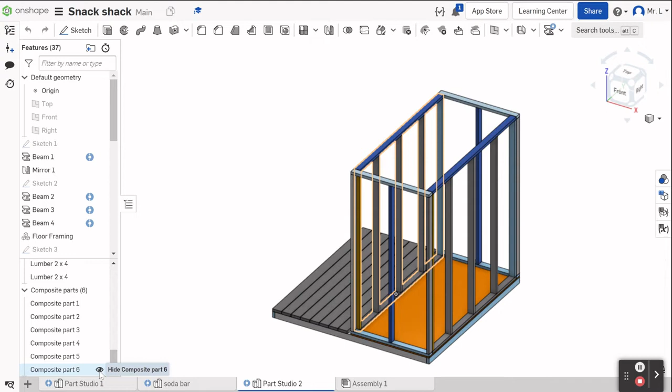So I'm going to make some of these composite parts invisible. I got to find the right ones. Basically, I want to make the walls invisible to get them out of our way to start with. There we go, make these all disappear by selecting our composite parts and clicking on the little eyeball. And so now those have disappeared.

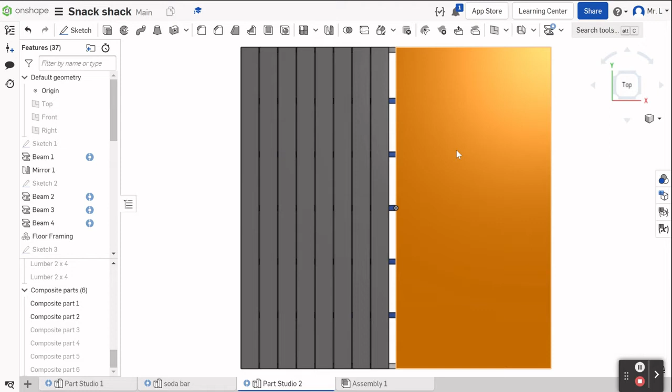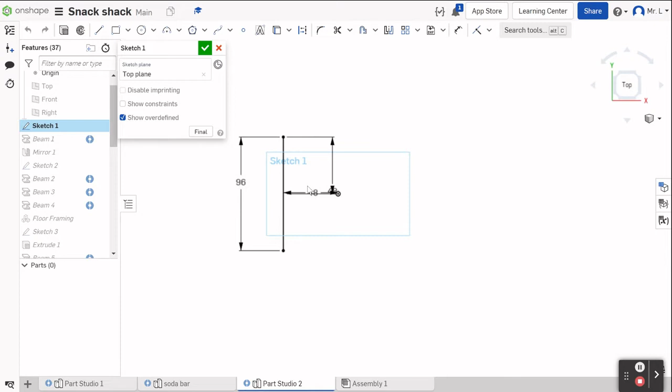Now we need to look at, I'm going to go to a top view here. We're going to have to remove some of these, but I'm going to go and find the sketch where I made the floor, which was actually sketch 1. So I'm going to go to sketch 1, double click it. Is that the right one? That does not look like it. Was it sketch 3? Let's see. Sketch 3, there we go.

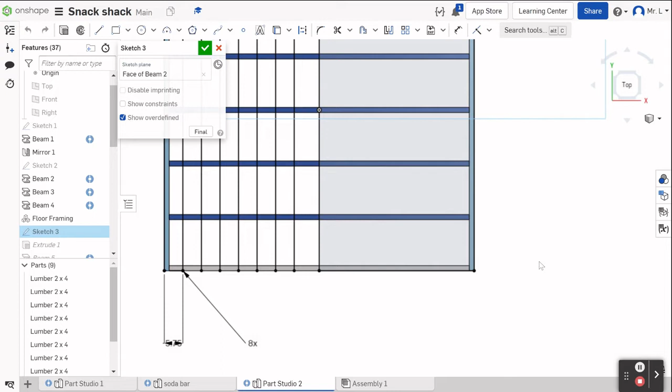Okay, so I'm going to go with sketch 3 here, and I'm going to delete that. And I'm going to go and draw a rectangle, so I'm going to go with a corner rectangle. I'm going to attach it here, drag it down, and attach it to the outside here.

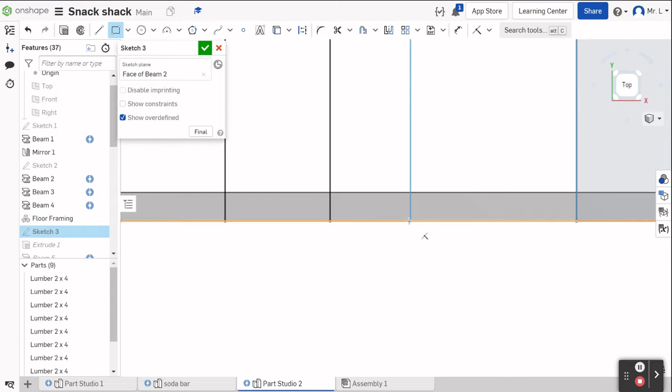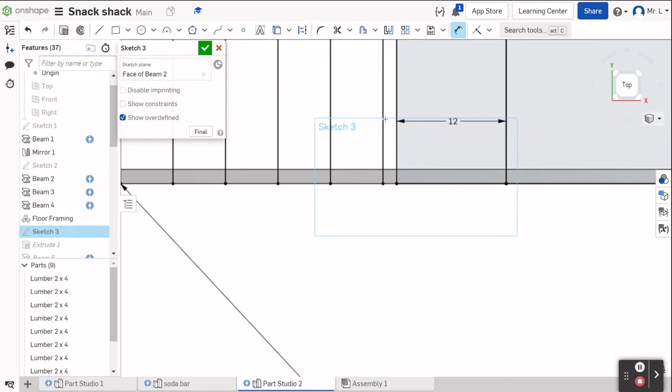So notice the depth of it is still not defined. Then I'm going to go to my dimension tool, and make it a foot, because instead of 4x8, we're going to make it 5x8. So we're going to go 12 inches, 12, enter. Okay, and I'm looking at this. I can already tell it's going to be way too close to this board, so I got to get out of the dimension tool. Escape dimension. Now I'm going to click on that. I'm going to hit delete.

Now I'm going to go with my green check, and that gives us something looking like that. Now I'm going to go back up to the extrusion. Was it extrude 1? Yeah. So actually first I got to turn sketch 3 back on. Show sketch 3. We're going to turn sketch 3 back on so we can see that. I'm going to go back to extrude 1, and I am going to click, oh, you know what?

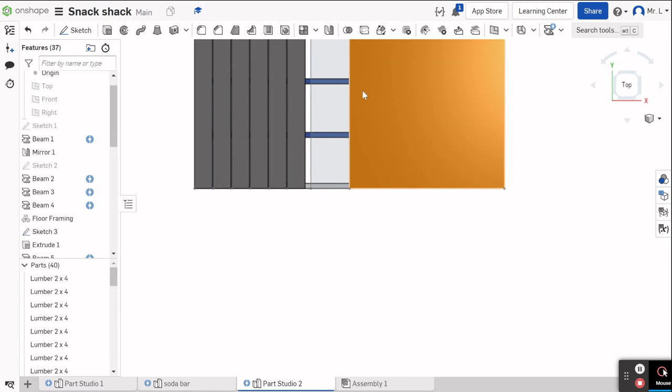Cancel that. I'm going to have to make a second extrusion. The only reason is because if I were to just add it to the existing extrusion, it would make this one piece, and we want this to be 2 distinct pieces of wood. So we're going to go up here to extrude. I'm going to select that, and good, it stayed as new. If it had defaulted to add, it would have added it and made it part of the same piece here. We don't want that, so we're going to make sure we keep it on new, and make it 3/4 of an inch, so 0.75, and click off of that.

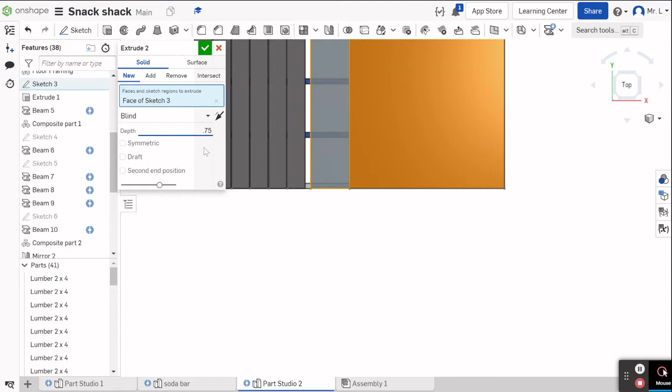Make sure it still says new, which it does. Green check. So now we've got our floor that comes out an extra foot, so we have a 5x8 area inside. So we're going to do that.

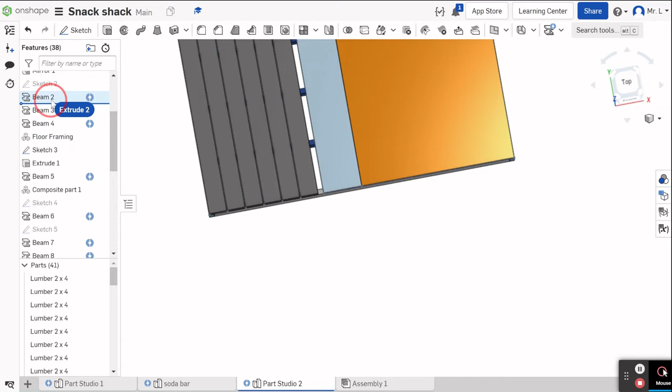Now the next part of the problem is, see, we've got extrude 2 way down here. We need to slide that up because some of our other things are based on this, and so it needs to be above the drawings that come above the floor. So we're going to come here and drop it right down underneath extrude 1, pull it up there, and then I'm going to turn off sketch 3 again and hide that so it doesn't clutter up our view.

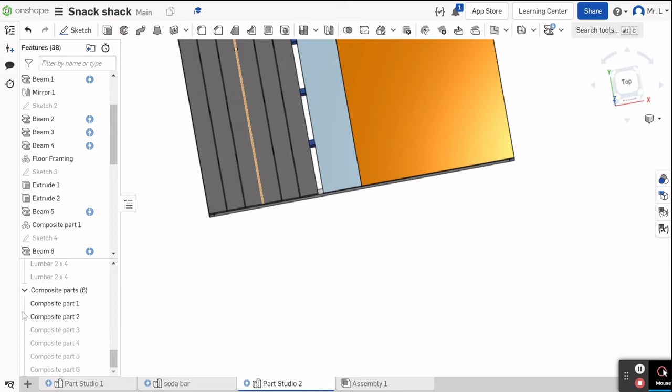All right, so the next thing we've got to do is figure out where all of our walls are going to go. We're going to have to move our walls, basically. Apologies for interrupting again. Okay, so I'm going to figure out, let's see, we've got our flooring, our floor frame, extrude 1, extrude 2, our flooring. What was sketch 4?

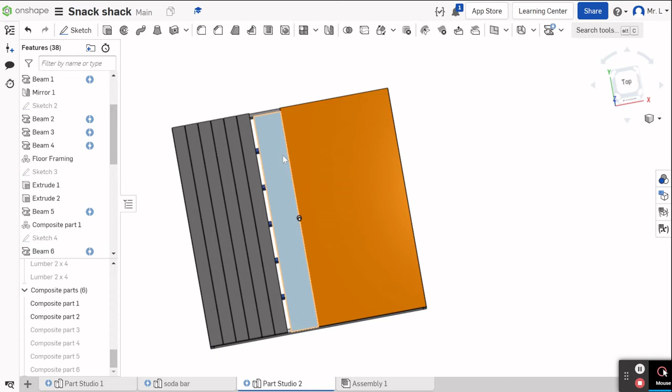Oh, I see right here my extrude 2 didn't go all the way to the edge, so I'm going to come back up here to extrude 2, double click on it. I've got to turn the sketch back on momentarily, and click this little piece over there, green check. Now I've got a floor that goes all the way across, so I'm good to go there.

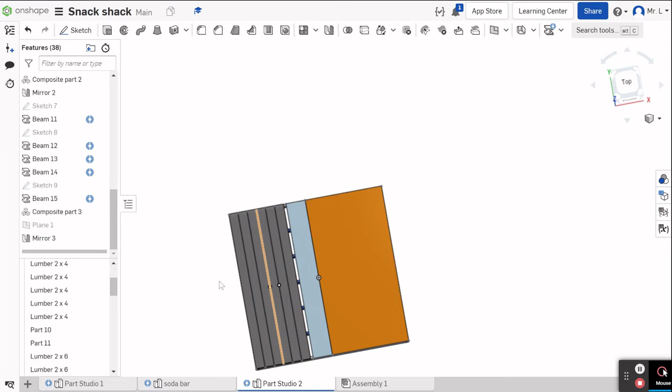All right, here's where it gets tricky. I have to figure out which walls I put in first, so I guess what I'm going to do is start turning composite parts back on and look and see what they're drawn off of.

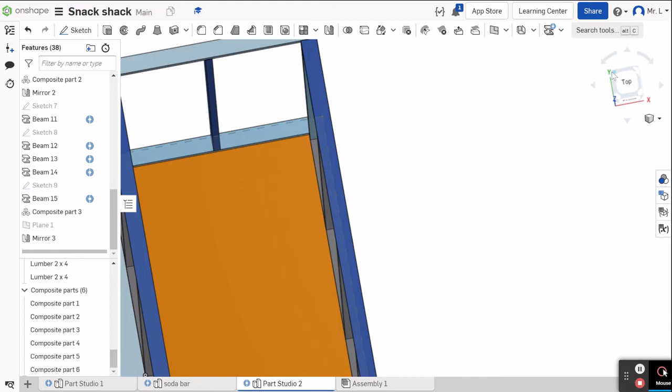So everything's turned back on. I'm going to flip this around. I think I drew on this side, beam 6, so sketch 4. Yeah, so this would have been my first one. So I'm going to open up that sketch. Yeah, see, I went from that corner to that corner.

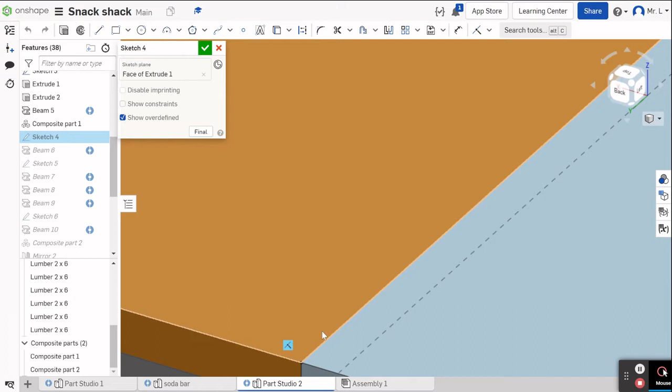So here, what I'm going to want to do is delete this constraint that I have right here. If I hover over it and highlight it, I see this constraint, which is the coincident tool that constrained it to that point. So I'm going to hover over there, click on that to highlight that constraint, hit the delete key, and that takes it away.

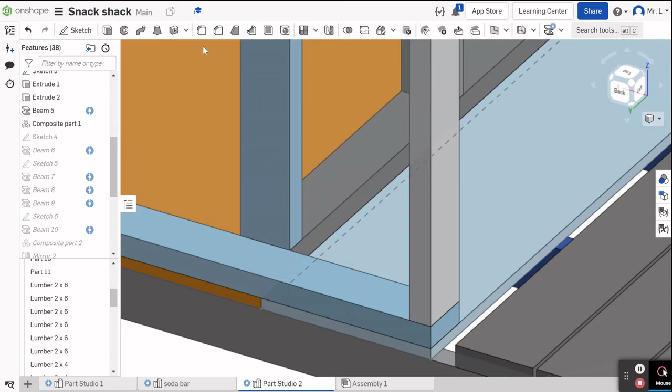So now what I'm going to do is come up and hit the coincident tool again. I'm going to pick the point of the end there, and then of my line, and pick this point there. Then I'm going to go green check, and let's see what this does. Hopefully this extends our wall. See, it extended our wall. And we still have this 2x4 centered.

We are going to have to mess with that, but let's get all of our framing out first. So our end walls are good. Now I just have to move this wall. Unfortunately, I think I mirrored it.

Okay, I did that. So sketch 7, beam, sketch 8. All right, that's good. Those are our beams. Sketch 9 was the top plate. We're good, I made a composite part.

All right, plane 1. So I need to change where plane 1 is to do that. Now we bumped our wall out 6 inches, or 12 inches, so I'm going to need to move this plane over 6 inches. So this should be 30 inches will be my halfway point. So I'm going to make that 30. Because remember, I just mirrored this back wall on this plane, and I had it at the halfway point, which was 24 inches. So if I change it to 30 inches, now that bumps that wall forward.

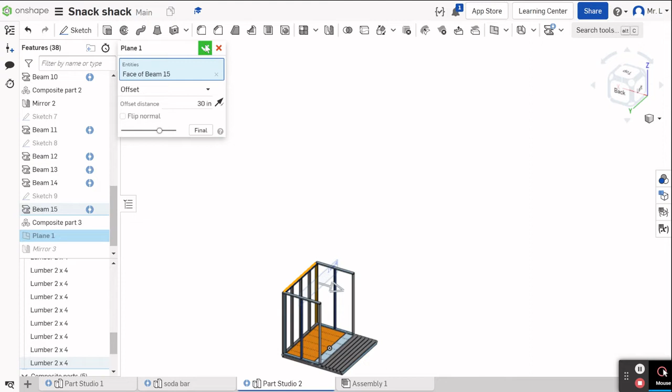So green check, now that wall is forward, and we are good to go on that. I believe that should be sitting right on the edge. Yeah, see, that's sitting now right on the edge of that new board. So we're good to go there.

Now let's see, I think I left a sketch on that I just want to turn off because I'm seeing something down there. I think I left sketch 3 on. Yeah, I'm going to turn sketch 3 off just because it's annoying me.

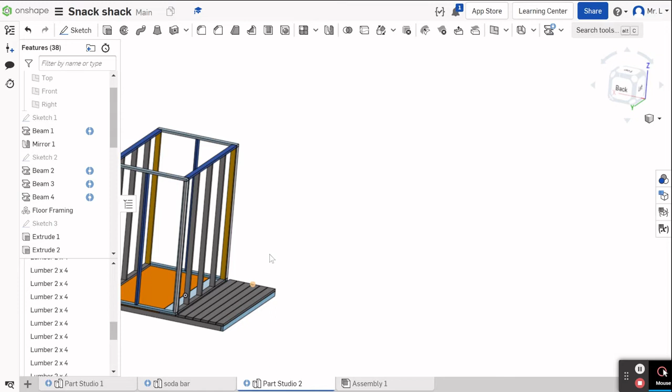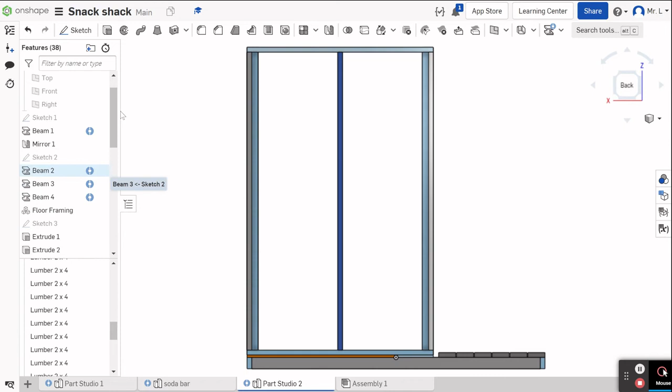Okay, now here's our problem: figuring out, if we look at this from the side, where we want these to be. Now this is too far of a spacing. Before we had them on 24-inch centers. So I think we're going to have to bump this back to 16-inch spacings like we would if it was standard construction. The reason that's really important is because the edge of the sheathing has to be on a piece. So we're going to have a stud centered on this mark right here on this 48-inch mark. Otherwise, there'll be nothing to nail your sheathing into.

So we are going to go and let's see here, where is this one? This is beam 8. So yeah, sketch 5, we're going to take and modify sketch 5. So I'm going to double click on that.

Then I am going to, how did I constrain this? Oh, I constrained it on the center point. So I'm going to click on that center point constraint, and then hit delete. And now see, this turns blue. And so this I want to be 16 inches from the outside. So I'm going to do a dimension tool here to here, make that... see now it's 30 inches. We don't want 30 inches, so we're going to go 16, enter.

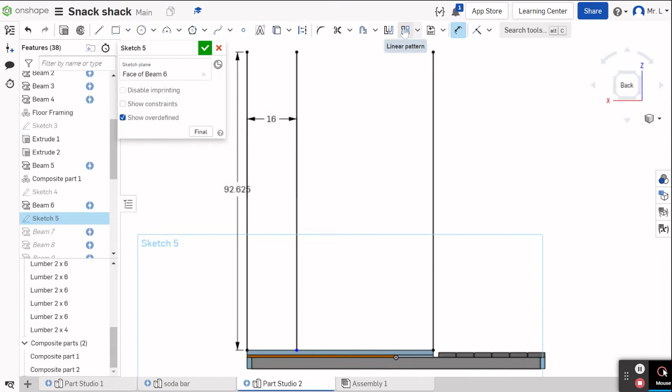This is going to make us put a couple more in there. I'm going to make a linear pattern right now, put 2 more in here at 16 inches. So we're going to go up to linear pattern. I'm going to click on this. This is the piece we're going to move over.

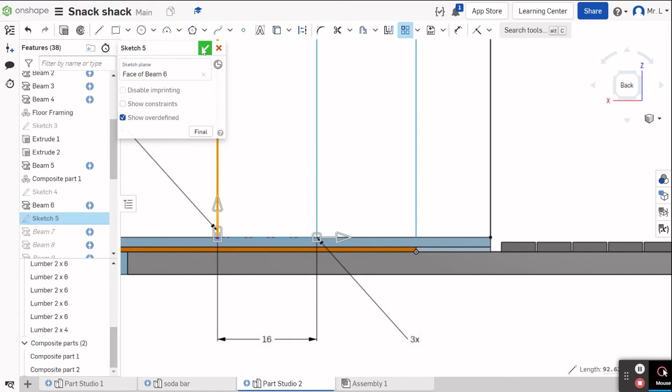Make that 16, and it should drop one. See, I got one here at 16 inches, and I got one right on that 48-inch mark. So our sheathing will go to that point, and we'll be good. So I'm going to go green check.

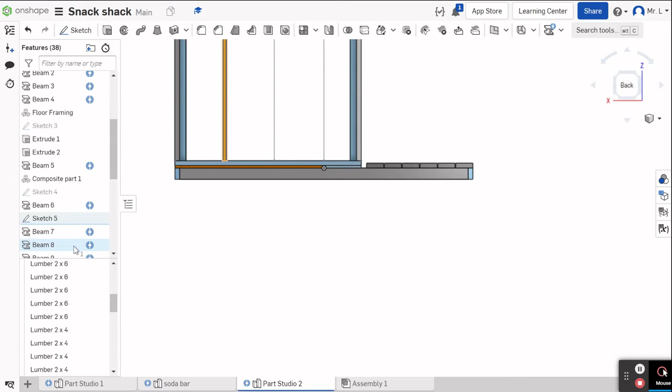And then I need to turn on, what sketch was that? Sketch 5. Turn sketch 5 on again so we can see that. Beam 1, beam 8. So we're going to need to look at beam 8, and I'm just going to add this stud and add this stud, and make sure that they're lined up right, which they are, since we already did that before.

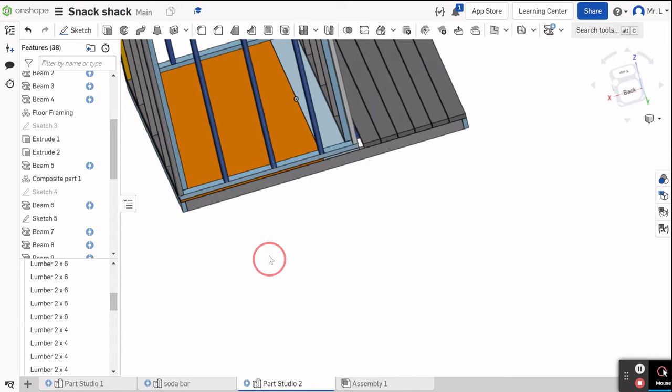So we're going to go green check, and now we have our walls modified, this wall. So now I'm going to come down and, what is composite part 1? I got to figure out which composite part I'm looking at. 1, 2, 3. So I got to find composite part 3.

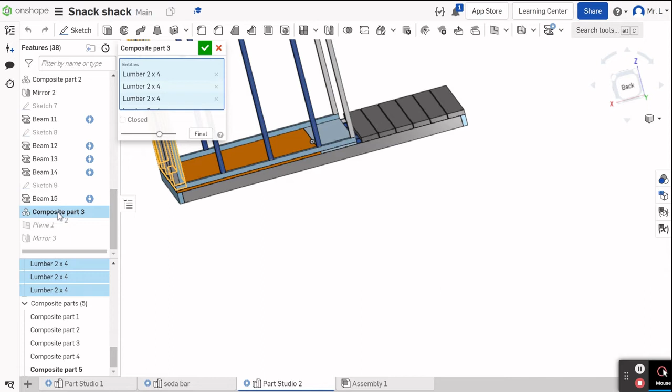Where I made that, which is right here. I'm going to double click. Apparently that's the wrong one. Let's find composite part 2.

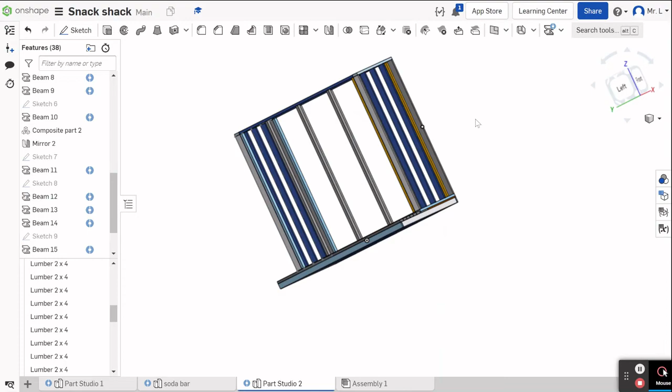That's it. So I'm going to add this piece, and I'm going to add this piece to it. I'm going to go green check, and since I mirrored the composite part, I now have, if you look at this, I now have the framing adjusted.

So now we have effectively changed the size of the shed from a 4x8 to a 5x8 opening area. Okay, so the next thing we need to do is we need to add the top plates on here. So we're going to go to a top view.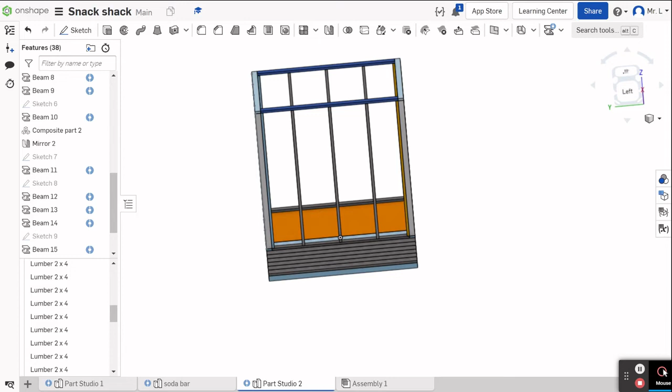And we got plenty of time. So we're going to go to a top view, and excuse me, my battery's running low on my microphone here. Let me plug it in.

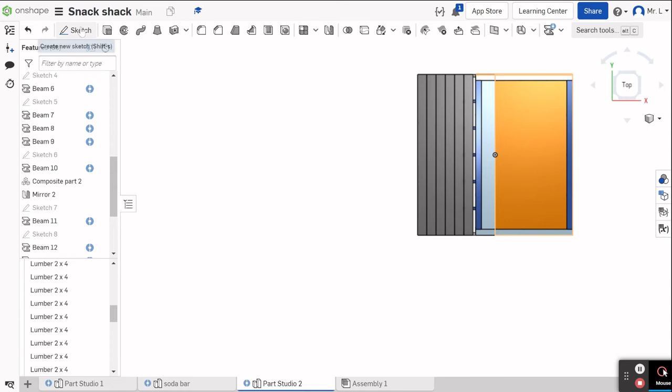Okay, so we're going to go to a top view, and I'm going to do a sketch. Actually, first I'm going to turn off that sketch we were looking at, sketch 5, so I'm not seeing the dots from that. So we're going to go top view, go to sketch, and sketch just on the surface of any of these plates.

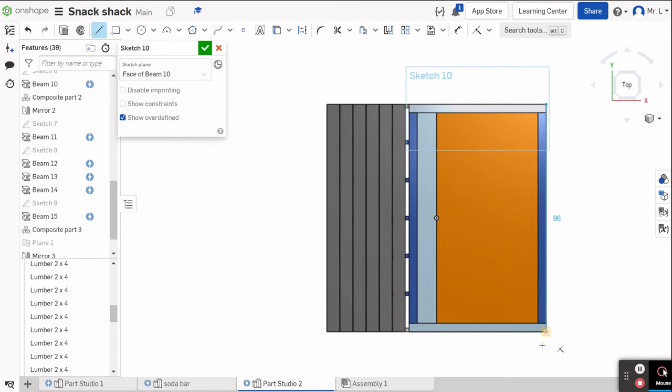And so we're going to do a line. You know what, I could do it on the front. It won't make a difference in terms of the construction, but we started drawing from the back, so I'm going to stay consistent and do the same thing here. Then I'm going to attach that line to both of the corners, so from corner to corner. And then I am going to go green check.

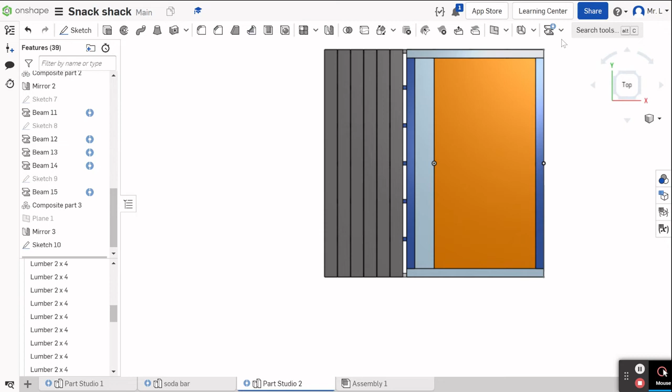And so now I've got my line right here. I'm going to go beam tool, and I'm still set up on the timber, lumber, 2x4, all that. So I'm going to click that piece, pull it in, and rotate it that way. And yep, I need to pull it up as well. So I'm going to pull it up, and then I'm going to hit the green check again.

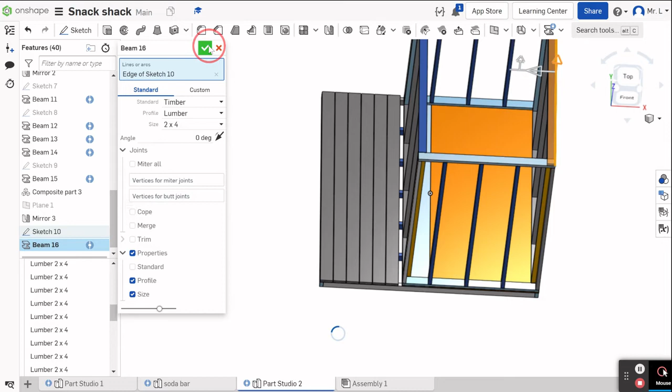And so now, as soon as it generates, it renders it. Now I have that top plate. My computer's being super laggy here, but if you look at this, this top plate is the one that ties the walls together. So we got this wall, which we can build on the ground and then stand up, and this wall, which we build on the ground and stand up. Then this plate here ties them together.

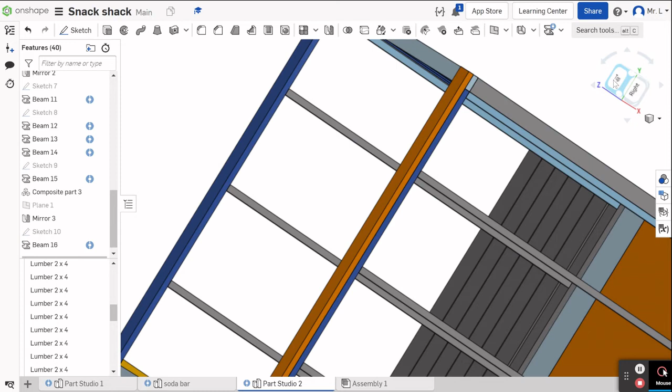All right, so let's go back to a top view again. And I got to find that plane that I made there, that plane 1. I'm going to go ahead and turn plane 1 on again so we can see it.

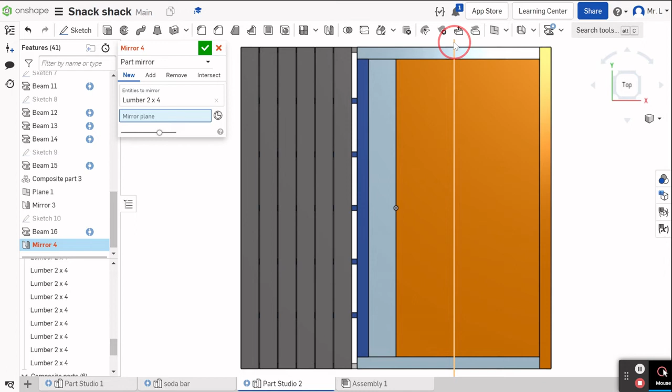I'm going to mirror that top plate over to the front. So we go to entities to mirror, click the top plate, then the mirror plane, click plane 1, and hit the green check. Now we have our top plate on the front.

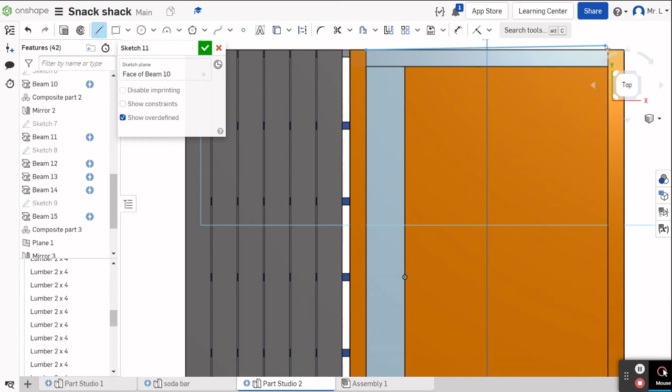We also need a plate that's going to go here on the side. So we go back to sketch again, and sketch on this plate. We'll select the line tool and go from that corner point of the top plate to the corner point of that top plate. Get out the line tool, green check.

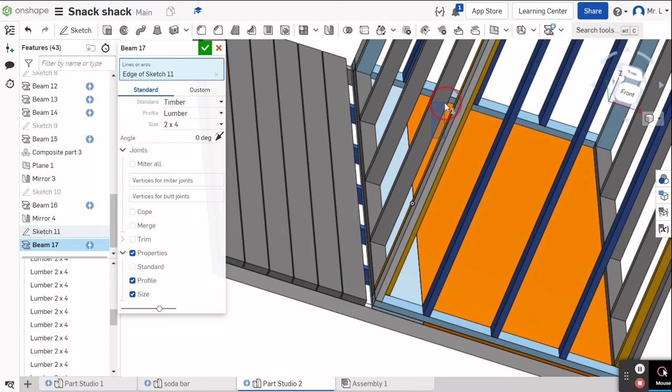Beam tool. Once again we're making a 2x4, so we click on that line, pull it in. Let's rotate around a bit, zoom out, and pull it up too. You see it's kind of down, overlapping the one below it, centered on that line. So we pull it up and hit the green check, and now we've got that.

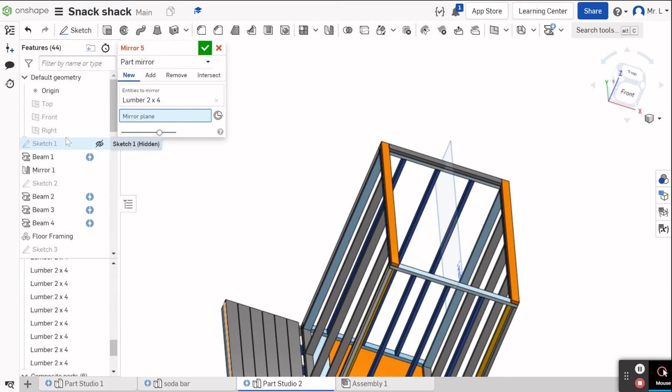And we're going to mirror it. So click mirror, entities to mirror, click on that top plate we just did, then click mirror plane, and I'm going to use the... let me look back, make sure I'm doing the right one. Front, we're using the front plane. And there we go, green check.

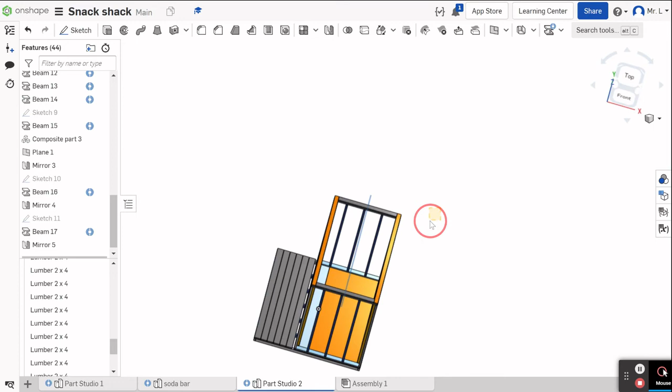So now if you look, we have the top plate on the sides as well. So now we essentially have the basic framing done, the basic studs, the walls. Now we need to draw in our opening, so I'm going to turn off this plane here because we don't need to see that.

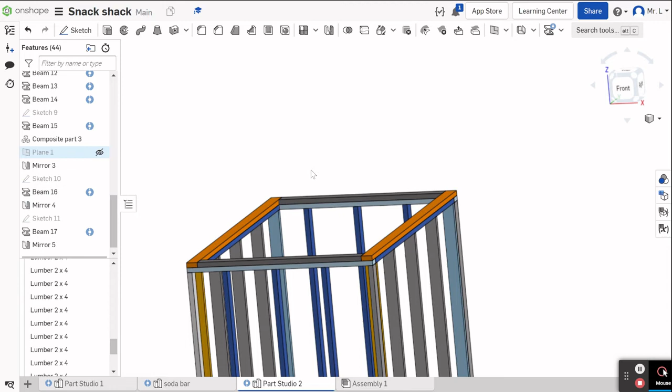Now we've got to decide what our bar opening is going to be. We need to figure out how high we want it, so we'll look at it from the front, which would be our left view. We're going to figure how much room we want to leave - maybe 6 to 8 inches, probably 8 inches in from the side is about where we're probably going to go.

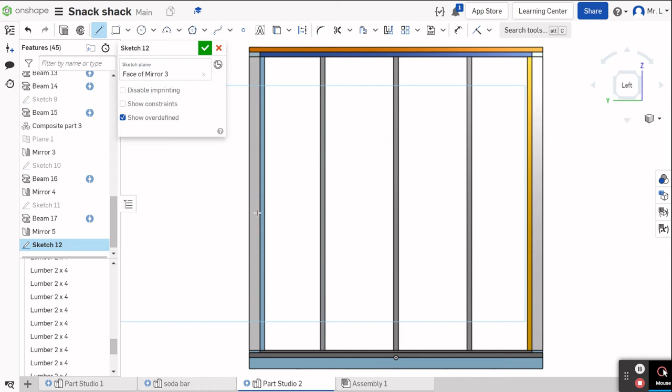So we go and do sketch, on the face of any one of these beams - we'll go from right here, the face of mirror 3 is what I selected. Then I take the line tool and make a line that goes across. Make sure it's lit up with the yellow and the blue so that it's horizontal, then get out of the line tool.

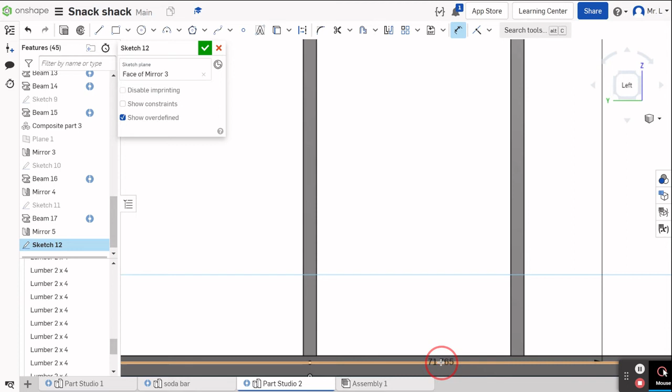Okay, so now we need to make our definitions here. We go to our dimension tool, and click from there to the top of the floor, and decide we're going to make that 42 inches. So let's make that 42, enter. Now we have our line defined from the top.

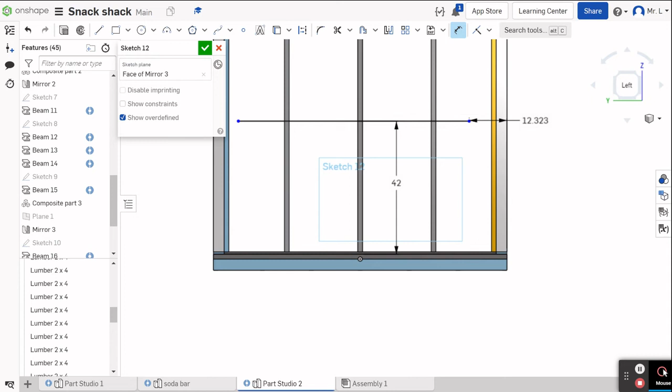I think that's doable, to make it 8 inches from the side. All right, so we'll do that, and then we'll do the same thing on the other side as well.

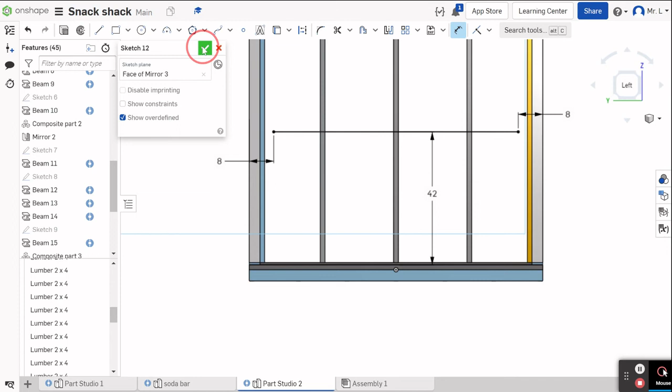Make that 8 inches, 8, enter. And we are going to go and do our green check. Okay, back up to our beam tool.

And we are going to select that piece. Now, if you see, it puts it horizontally, so it's the wrong orientation. So we're going to need to go and flip it 90 degrees. So 90, enter, and then we're going to need to pull it back in.

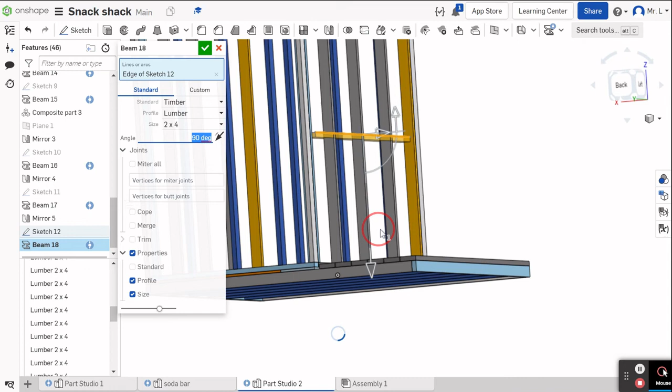And in this case, since we put in the dimension that we wanted at the top, we're going to need to pull it down. So we pull it down. And if I turn around and look, yeah, it's flush with the wall. We're going to go and do green check there.

And I'm going to need a trim. Actually, you know what I'm going to do here? I'm going to go back into that tool. I think I can do trim. Parts to trim to. Now it's going to trim this piece if I do that. How am I going to do this?

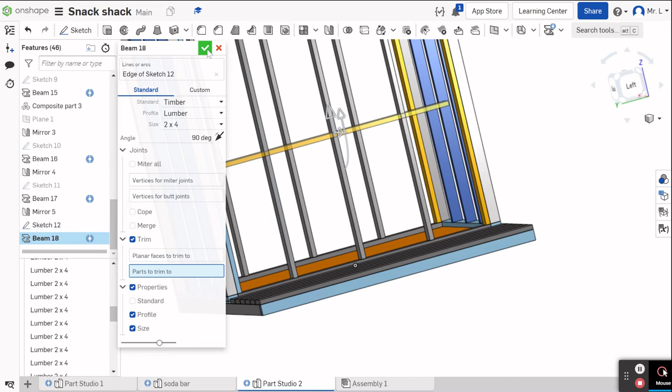All right, we're going to come back to that in a bit. So we're just going to, for now, green check. So we're out of that, and we're going to cut the wall out there in a bit. But for now, we'll go ahead and leave it.

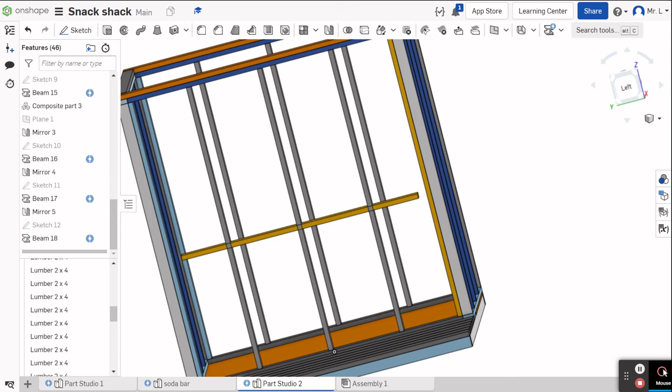Okay, and then we got to figure out how high we want to make it. Figure it's got to be above eye level of the average person. Most doors are a standard door is 7 feet, I believe. Standard door in a house. So we got 8-foot walls, so we'll make our next line at 7 feet.

So we're going to go sketch again. We're going to click on the face of one of the beams, and we're going to make a line. Zoom out. Let me get a view right here. There we go.

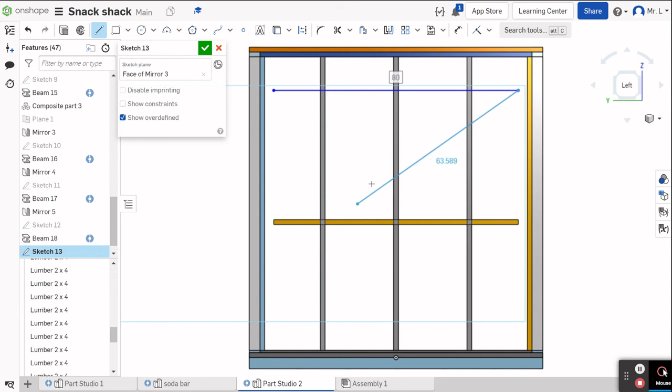Go with the line tool again. I'm going to come down and light up the edge there, so that makes it so that the end will be lined up with there. I'm going to click, I'm going to come across, I'm going to drop down and light up the end of that beam as well. And I'm going to come back up till I have that yellow dotted line going down to the end, and it's blue and yellow going across. Click, and I'm going to escape my line tool.

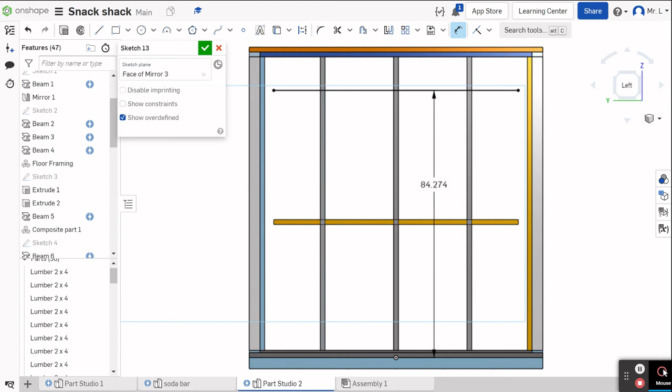Then I need to give a dimension from the bottom. So I'm going to take my dimension tool, click the line, click the bottom of the floor, and let's see, 7 times 12 is 84 inches. And there we go. So that'll be 7 feet up. Green check.

And I'm going to do, once again, a beam tool. We got our 2x4 lumber. We're going to have to, let's look at it from an isometric view so we can see what we're looking at. Make it 90 degrees. So it flips that on its side, pull it in,

and pull it down. And it didn't go in, did it? Yeah, it did. All right, we're good. Okay. Green check. Let's go back to the front view again.

So now we got to frame our sides here. So we're going to have to put in a cripple, as they call it, which is the stud that supports our, actually, as I think about this, that's not going to work. We're going to need to put a header in there.

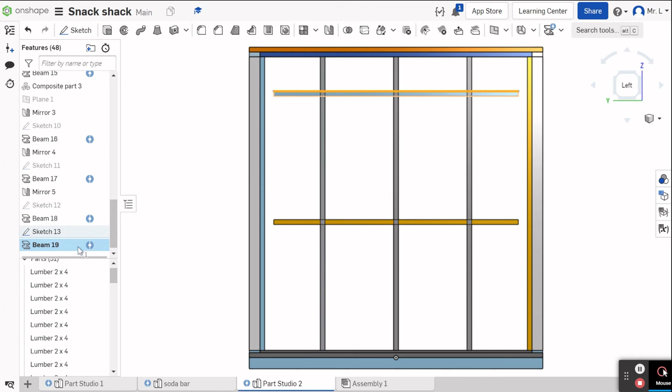So we're actually going to undo. We're going to go back into this beam tool here. We're going to undo our rotation. So we're going to go back to 0 degrees. Then we're going to select our lumber and make it 4x8.

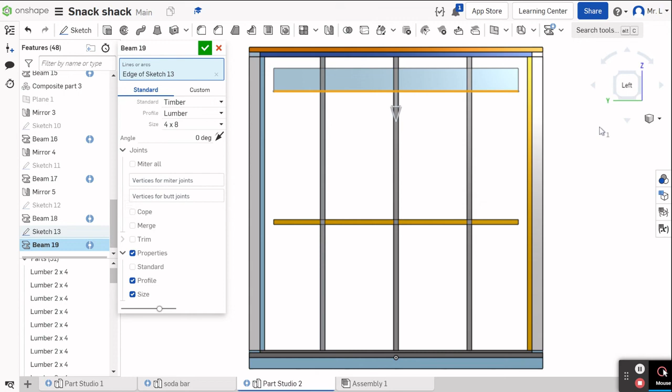And let's turn around and look at it this way. And I'm going to pull it back in, but leave it on top. And green check. So now we got a 4x8 up there. We got a 4x8 up there. So we're going to go back to our sketch again.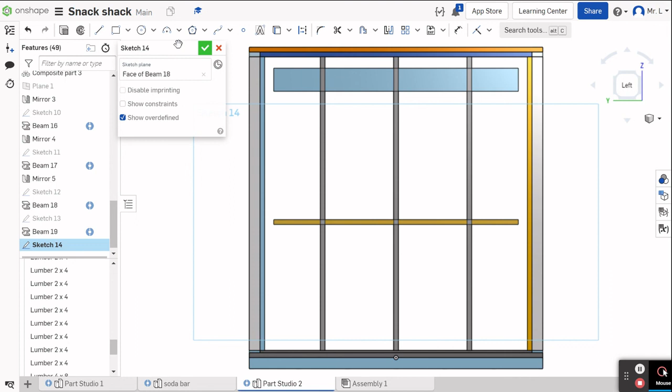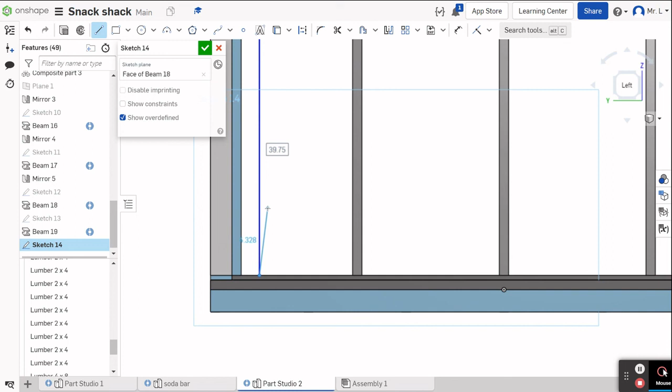And anything on the surface, we're going to go on the surface of our countertop there. And we are going to draw a line that goes from the bottom corner of that stud down to our sill plate. Make sure you have it lit up, the blue and yellow, so that you know that it is plumb. Going to get out of the line tool. Then we're going to go and do another line, and we're out of time.